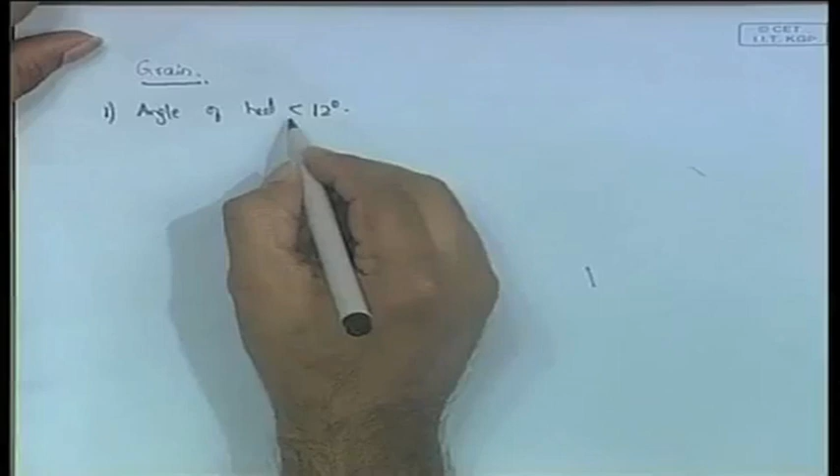When grains are put into the container and because of the grain shift, there is a heel of the ship. The rule says the angle of heel should definitely be less than 12 degrees. Because of the shift in the grain, there is a G0 G1, meaning a shift in the center of gravity, which results in a heel. The first rule says the maximum angle of heel due to any amount of grain shift should not be more than 12 degrees, or should be less than or equal to 12 degrees. It should not be greater than 12 degrees.

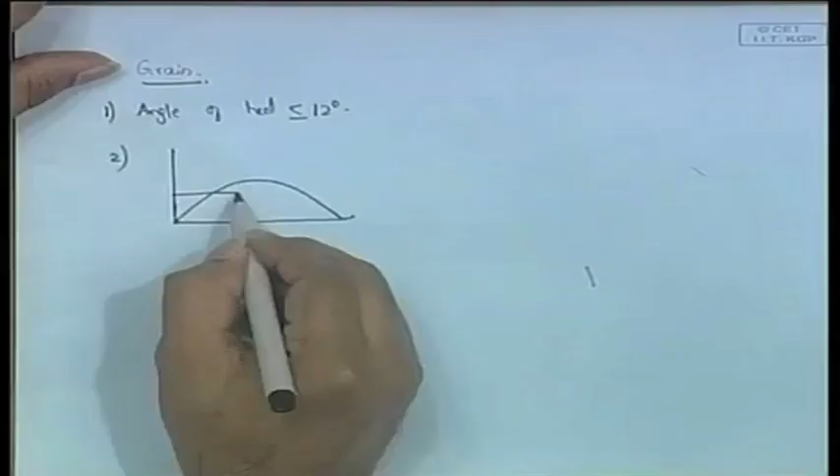Then the second rule is that in the GZ curve, when you have the statical stability curve, suppose this is your righting arm curve, and suppose you have a heeling arm curve like this. The rule says that the area between the righting arm curve and the heeling arm curve, up to an angle of 40 degrees or an angle of flooding if it occurs before.

Angle of flooding means that because of the heeling, some hole has come into contact with the water—that hole is actually on the freeboard, but because of the heeling it has now come into the water, as a result of which water is entering. That is called the angle of flooding.

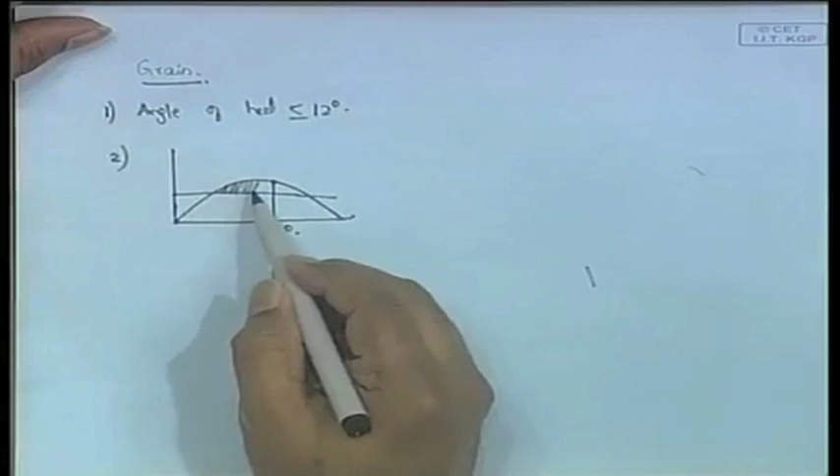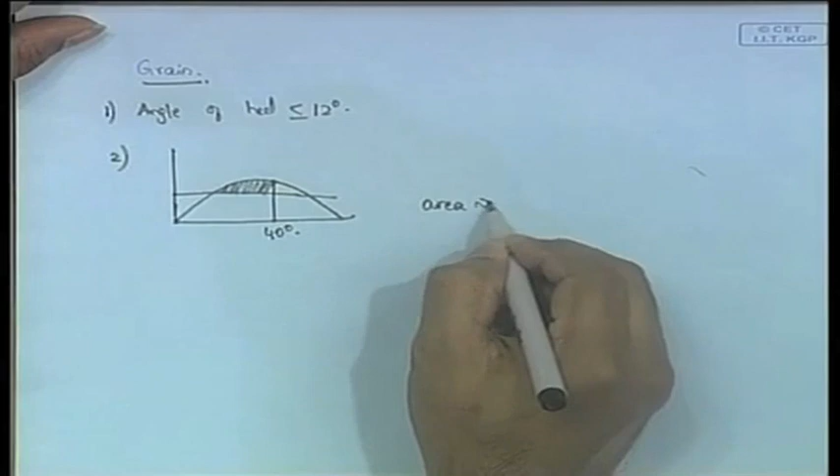So the area in the GZ curve between the righting arm and the heeling arm, between the angle of 0 degrees and 40 degrees, or the angle of flooding if it occurs before, this area should be at least 0.075 meter radians, or greater than or equal to 0.075 meter radians. That is the second condition.

Then the third condition is that GM, the metacentric height, should not be less than, or should be greater than or equal to, 0.3 meters. So the GM should definitely be greater than 0.3 meters. So these three conditions are the rules associated with grains.

Some time back I derived some other rules, so you have to remember all these rules. In the later stages, after the mid semester, we will deal explicitly with a lot of rules—rules associated with ships under different conditions like wind, heel, and all those kinds of things. There are a lot of rules associated with that you have to learn by heart and write as such. But for this mid semester, in 2 weeks, this much of rules associated with grains you have to remember, and something else I derived some time back. Those are rules associated with... some time back I did something here.

Okay, merchant ships, yes. So a vessel should have satisfactory stability—that is, the area under the righting curve should not be less than 0.055 meter radians up to an angle of 30 degrees. So all those things, those rules also you have to remember.

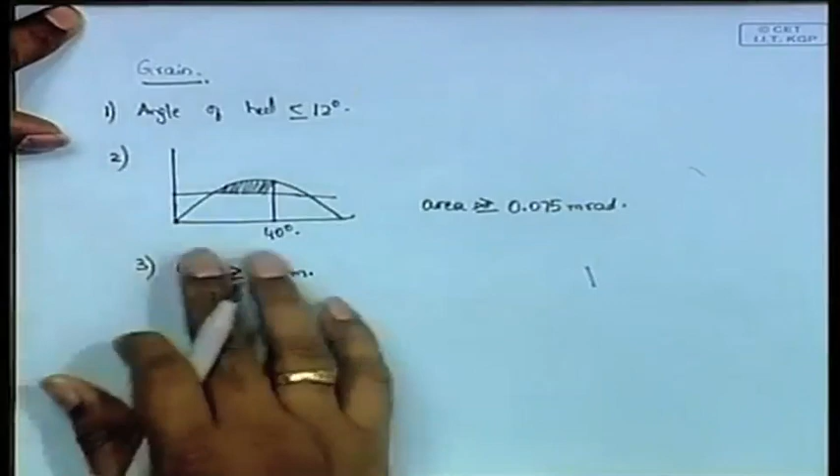In case you have such merchant ship conditions, the problem will state which rules you have to apply. The moment you see grains which are in container ships, you use these rules—the angle of heel, all three rules have to be satisfied. So the question will be whether the ship is stable, or is likely to be certified, something like that. If all three rules are satisfied, then yes, the ship is stable.

Note that even if it is exactly 12 degrees, it passes the test. Even if it is 0.3 meters, it passes the test. Similarly, 0.075 passes that. It's always equal to or greater than, not strictly greater than. So if it is any of those values, you pass the ship.

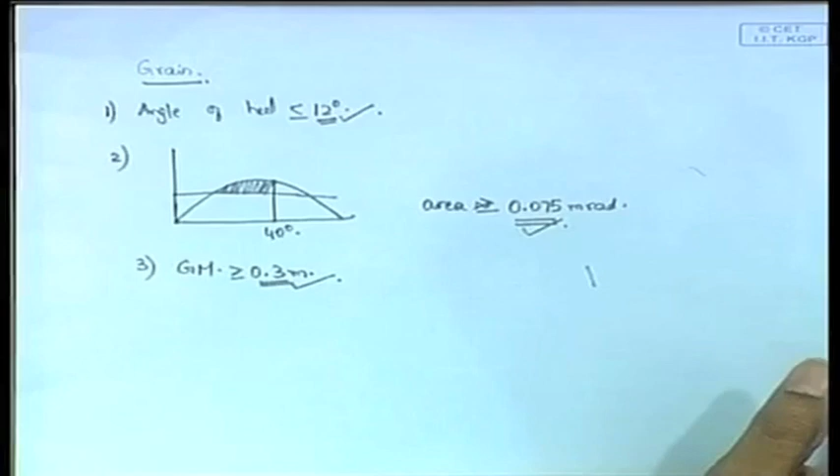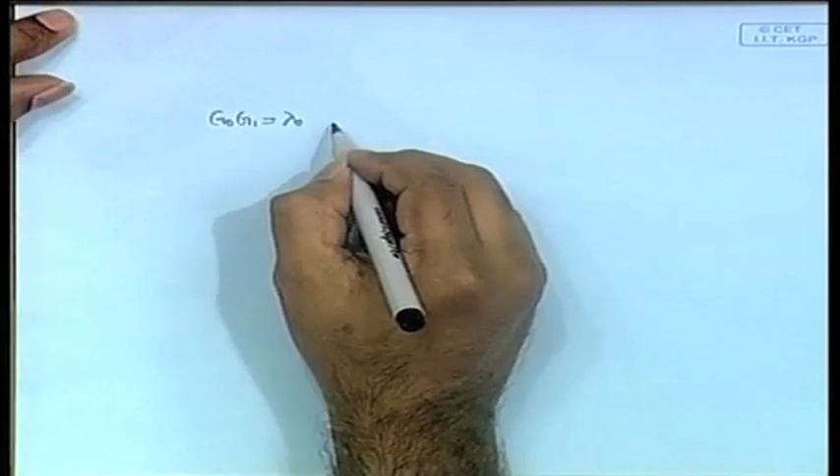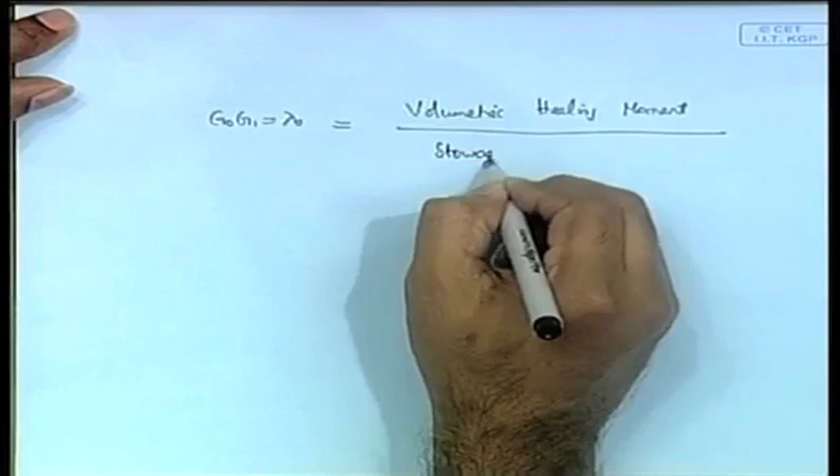Then some other things which I didn't explain exactly—in case of such grains, we use G0 G1, written as lambda 0. It is defined as the volumetric heeling moment divided by stowage factor into displacement.

So G0 G1, that is the shift in the center of gravity of the grain, which is producing your heeling for the ship, is equal to lambda 0.

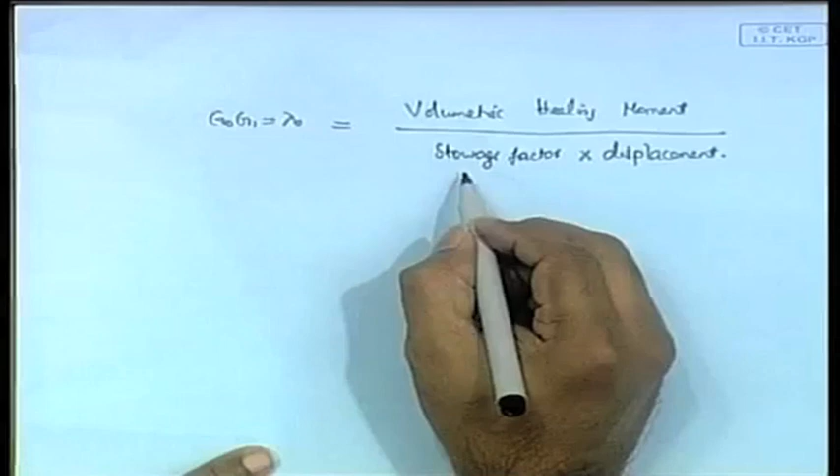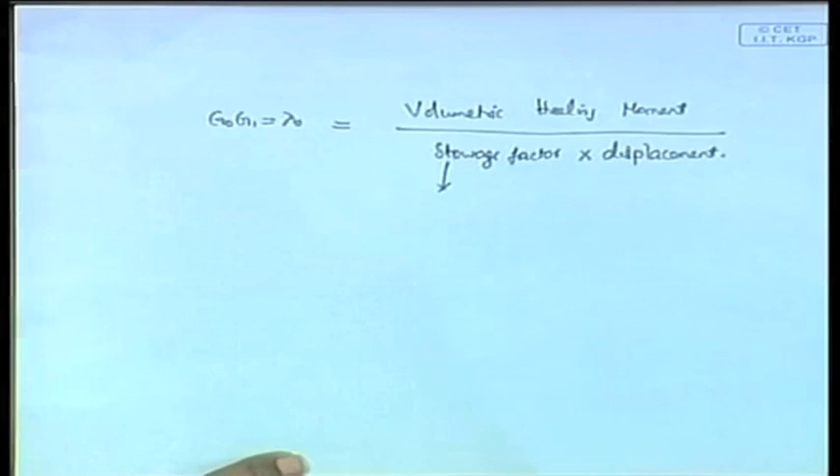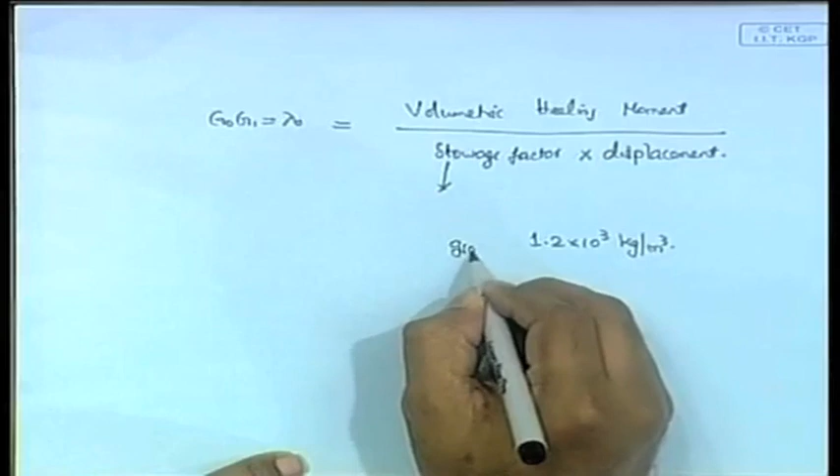This is equal to volumetric heeling moment. Now I didn't explain properly what is stowage factor earlier. I said something like a fraction, but that's not exactly right. Actually stowage factor means, suppose the density of that grain is 1.2 into 10 cube kilogram per meter cube. Let's suppose the density of the grain is this. Then the stowage factor is defined as 1 by 1.2 into 10 power 3.

It becomes meter cube per kilogram. This is the meaning of stowage factor. It is something like 1 by density. So it will become something like 10 power minus 3 kind of thing, meter cube per kilogram. That is the meaning of stowage factor.

So as you can see here, displacement is delta. It is not the volumetric displacement, it is the total displacement of the ship, which is the weight of the ship. So displacement will be in kilograms, and stowage factor is in meter cube per kilogram.

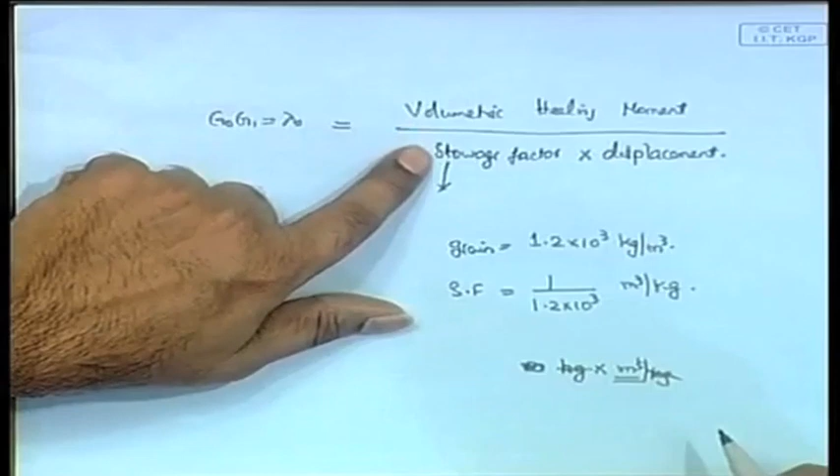So when you do that, you get something like a volume, meter cube, which has the dimensions of volume. Therefore, looking at the expression for G0 G1, which is lambda 0, it is the volumetric heeling moment divided by a volume. So that is an arm only, it's a distance. Since it's divided by volume, it becomes like a center of gravity, or G0 G1, that is the shift in the center of gravity. That is what gives you G0 G1.

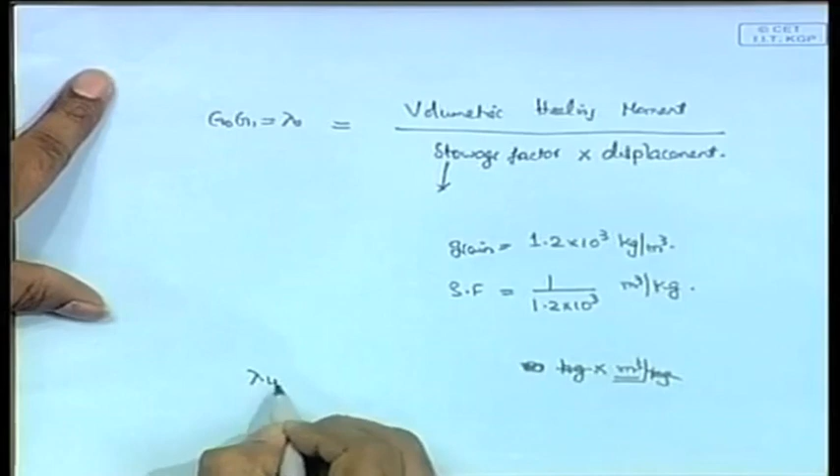Then lambda 40, meaning lambda at 40 degrees, is defined as 0.8 lambda 0. This is the second expression. This too you have to know.

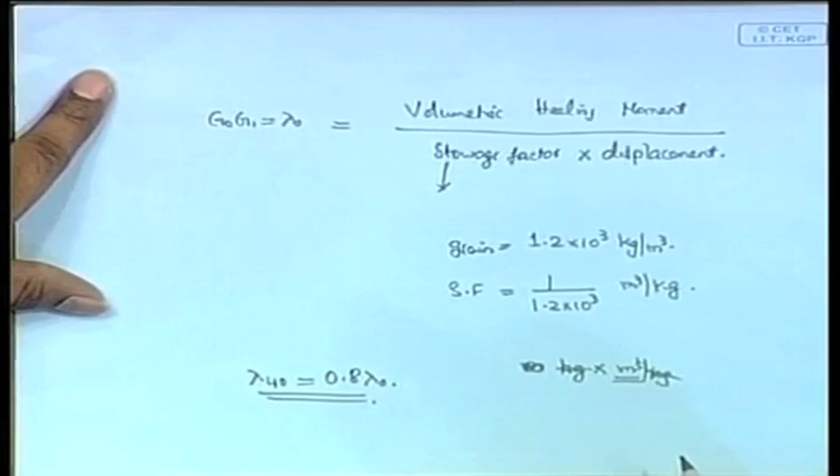Then let us do a problem. Probably this will explain it better.

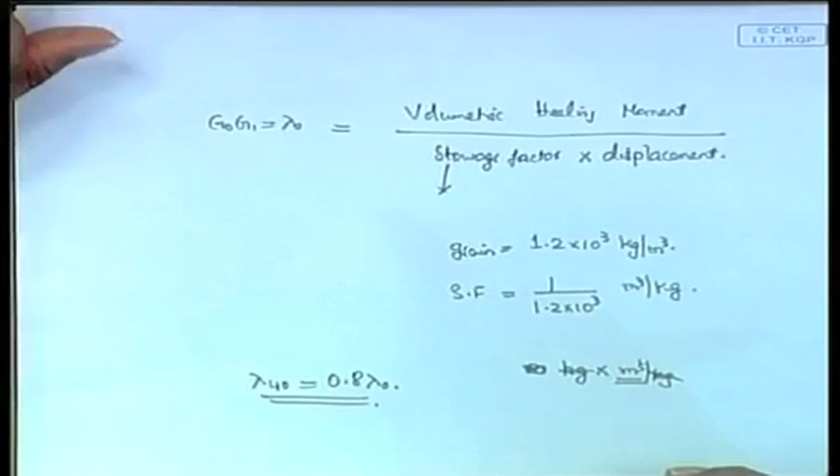Now you are told that there is a ship which has a light displacement of 7304 tons, and you are told that its KG is equal to 10.09 meters. Now this is a ship in which grain is added. So first of all, the moment you see the grain, make sure the question is going to be: will the ship satisfy the IMO criterion?

These are all IMO criterion questions. So will the ship satisfy the IMO criterion? First of all, of course, you have to remember the rules, then you will see how to do the problem.

Now you are given that the stowage factor is 1.3 meter cube per ton. So these things you have to change. Ton you change into kilogram, it will become 1.3 into 10 power minus 3 meter cube per kilogram. So don't forget that, you have to change that.

First compartment is filled fully, to full. Second compartment, the ullage is 8 meter. Third compartment is full. Fourth compartment is full. Fifth compartment, the ullage is 2 meter. Then it says that below that you are going to add oil.

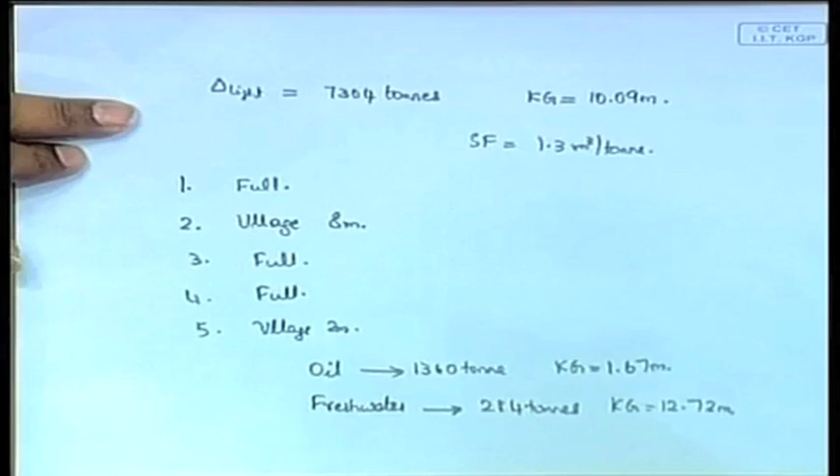KG, exactly. It is just for calculating your final KG of the ship. So it is just a measurement for KG, not for the movement of G in the horizontal direction—not for that, just for the vertical movement of G, that is the only thing.

So what you first have to do is find the net volumetric heeling moment, the net KG, and net displacement of the ship, because remember we have to find G0G1, which is lambda 0. In our definition, lambda 0 equals G0G1 equals volumetric heeling moment divided by stowage factor into displacement. So what do you need? You need the volumetric heeling moment and the displacement, two things.

Then that means now you have G0G1, from which you can get GM. To get GM, what do you need? One more thing, KM is given. In this problem KM is given as 11.3 meters, that I forgot to mention. KM is given as 11.3 meters.

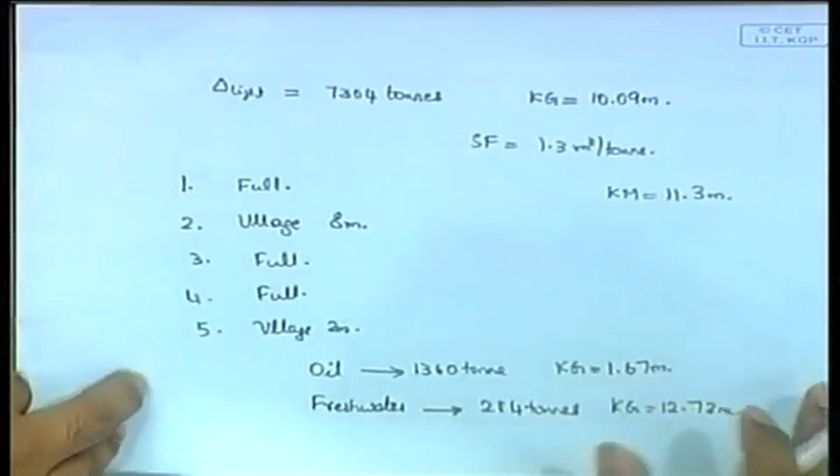So what do you have? What are you supposed to find? Remember, the three rules imply you need to find three things. There are three rules associated with grain. The first is the rule associated with theta, phi, the angle of heel. That means you need to find the angle of heel.

Now, what do you need to find the angle of heel? To find the angle of heel, if you remember, we are going to use the equations associated with the inclining test. You should remember the inclining test. To do the inclining test, you need two things: G0G1 and GM.

There are a lot of formulas we have derived so far, and of course they are all interrelated, but you have to remember them, all those formulas. So you have G0G1 and you have GM. G0G1 and GM are required in order to calculate theta. If you want, I can write the formula itself.

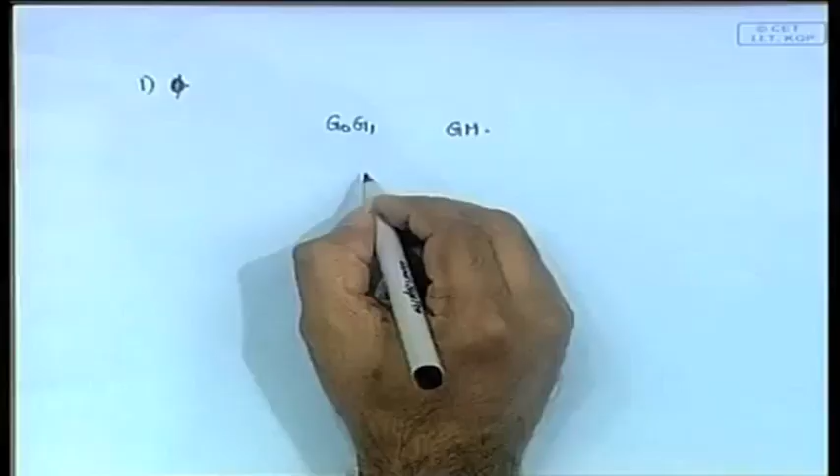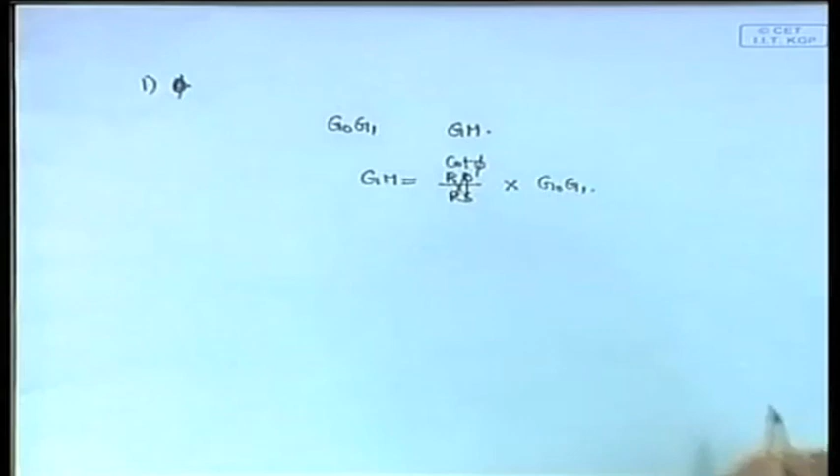This is the formula. It comes like this: R0 by R1, R0 by RS, becomes tan theta—no, I think it is cot phi. So this is the formula. So if you have to find your phi, this is the expression.

Please remember this expression. You will definitely have to use it—first of all, the question will have something to do with the derivation of heeling moment, the inclining test is sure, because it's a very important thing, the inclining test. So that means of course you will remember it. The method of derivation and the experiment is to be remembered definitely, and this final expression you just keep by heart: GM is equal to cot phi into G0G1. This expression is needed for a lot of such problems, and without that, you will get totally stuck on this problem.

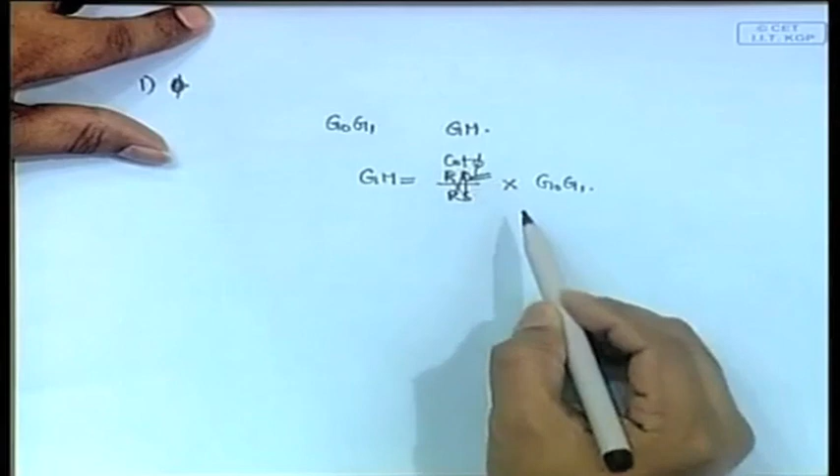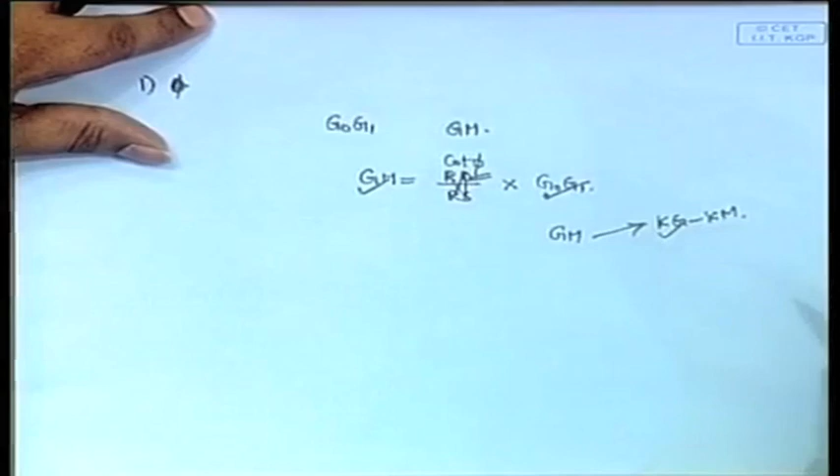Therefore, what we need to find here is phi. We need two things: G0G1 and GM. To get GM, what do we need? We need GM equals KM minus KG. This expression is to be remembered: KM minus KG. That means we need KG.

So Km minus Kg, this expression is to be remembered, therefore Gm. Km is given, that is fixed, there is nothing to do. Kg of the ship has to be found. This is important, from that you will get Gm.

So what have we found? First we need to find phi. There is a rule associated with phi, it says that phi should be less than or equal to 12 degrees. Number 2, it says that Gm should be greater than or equal to some value I gave, 0.3 meters. So from these two are required.

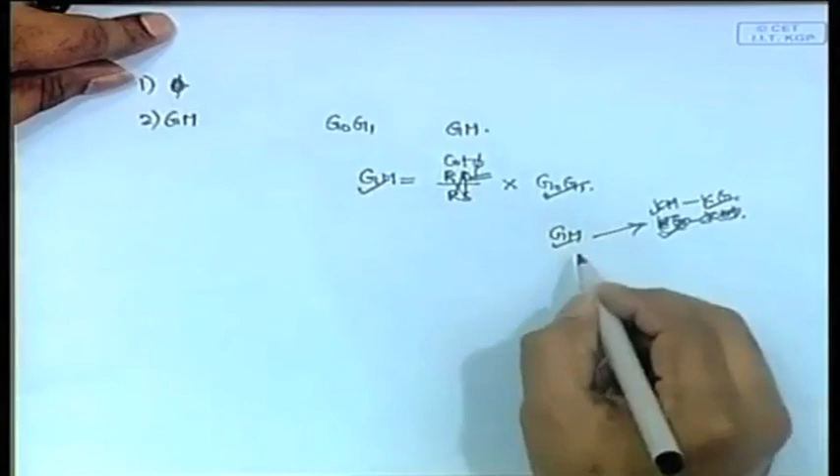Then 3, you have to find the area under the GZ curve, GZ phi curve between the heeling moment, and that area should be greater than something. So we will go step by step. The first thing is to find the, in one table itself we can do most of it.

So let us say this is a compartment, then the volume, then stowage factor, then volume, this is the weight, kg, moment, VHM. Now we make a table like this. This table should be able to calculate everything that you need in regards to this problem, that is we need to find the kg and lambda 0. So to do that, this table should be enough.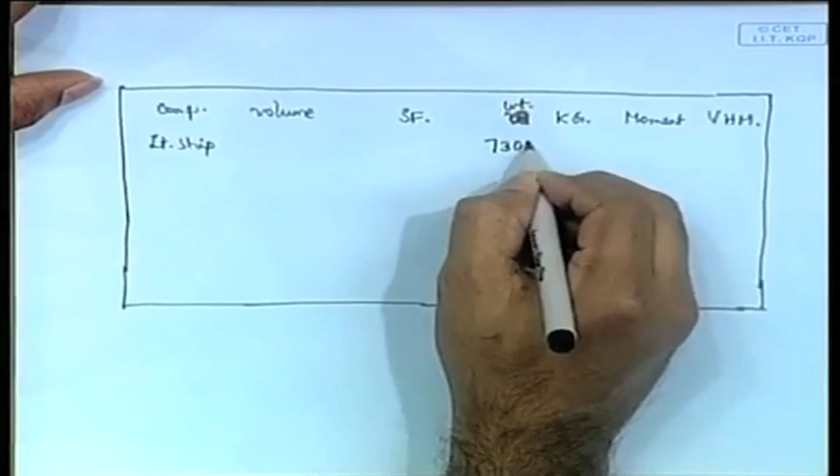So you have, let us take the first one, component is the light ship. Now light ship, there is no volume or stowage factor, the weight is given 7304 tons and its kg is given 10.09 meters. So you find the moment. Is there any volumetric heeling moment associated with the light ship? Note, volumetric heeling moment is the heeling moment associated with the shift of grain in a compartment. The light ship itself has no volumetric heeling moment, there is no grain there. So the light ship has no volumetric heeling moment, so this is not there.

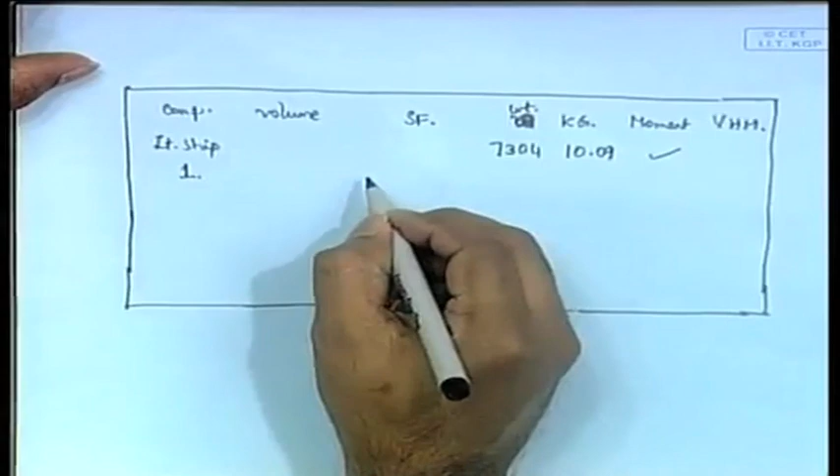Then you consider the first compartment in which grain has been added. They are told, now how do you find the volume of the first compartment? This is the first compartment, is full. So in this way you complete the table, you do it for all the components, and finally you have, in the end what you have, they have said oil. So all the different compartments are done, 1, 2, 3, 4, 5.

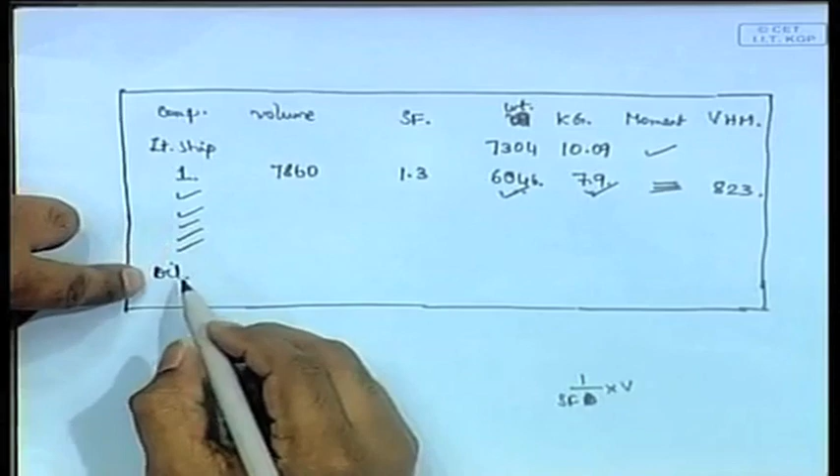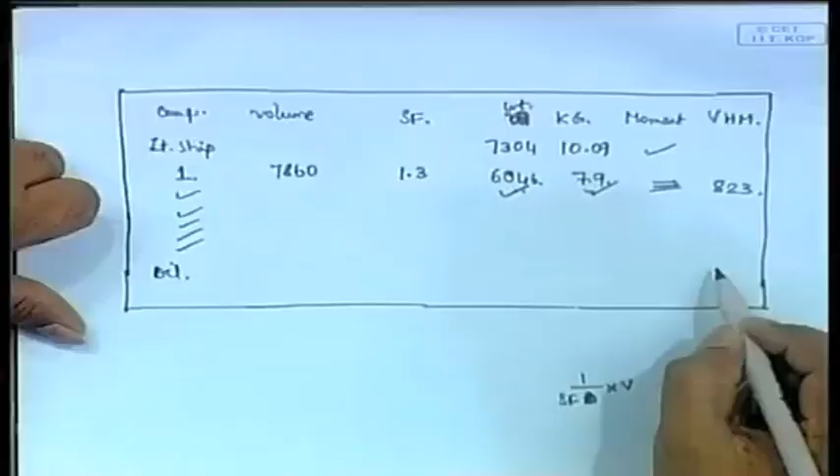So all the compartments are done, and then you have oil. For oil there is no volumetric heeling moment. Volumetric heeling moment is defined only for grain, it is a particular property of grain. As you might imagine, oil also shifts like grain, no such thing, it is defined like that. Volumetric heeling moment is defined only for grain. Therefore, forget about, there is no volumetric heeling moment as far as the oil is concerned. So this is not there, but this oil is given just for the sake of its weight and kg.

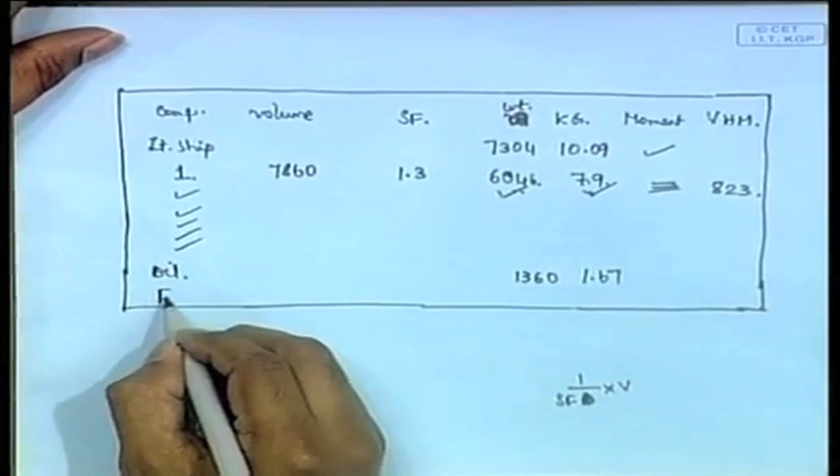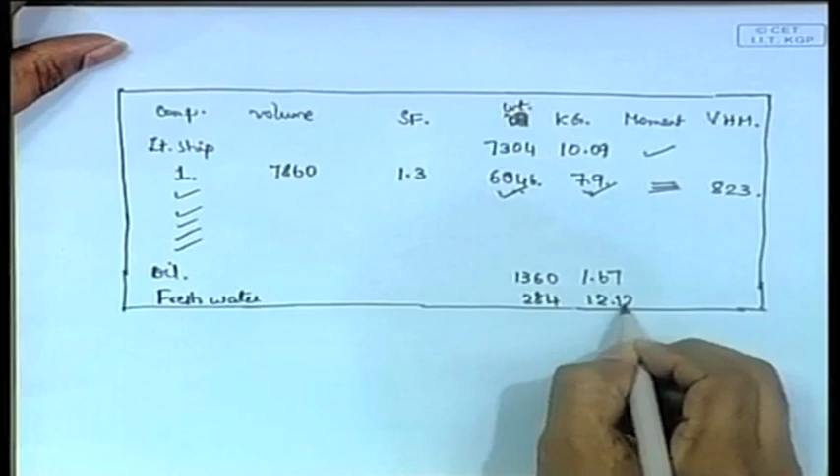Therefore, here only two things are important. Weight, it is given 1360 tons, so this comes, and its kg is given 1.67, and similarly you have fresh water. Fresh water is given, which has it says 284 tons and its kg is 12.12. Okay, now we have the complete table.

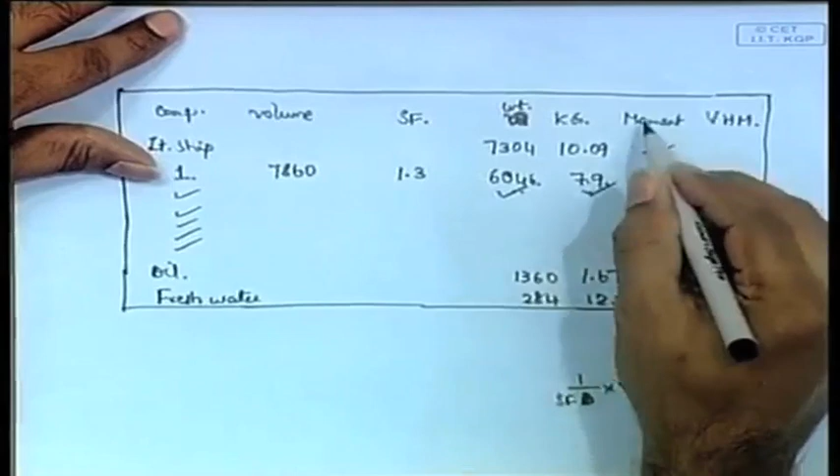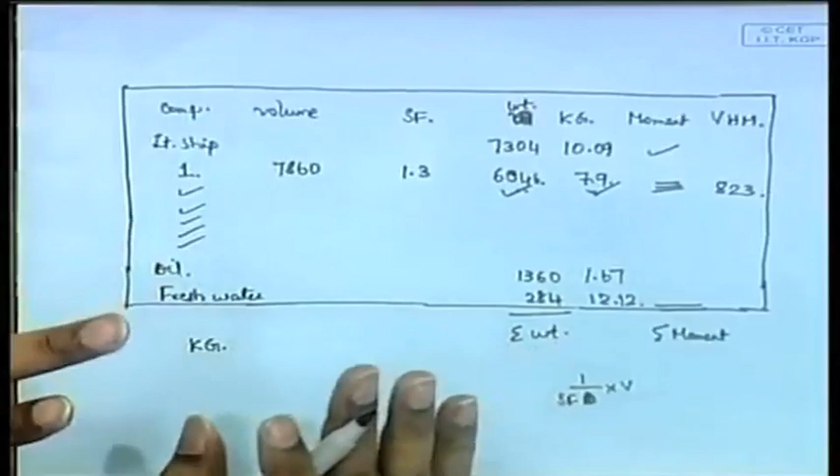Now, what do we find out from this table? See, here we have the total moment, which is weight into the kg, sum of the total moment, sigma moment, and this when summed up will give you the sigma weight, and therefore, your net kg of the ship after all the healing, everything is over, the net kg of the ship will be given by the sigma moment divided by sigma weight. This will give you the net kg of the ship.

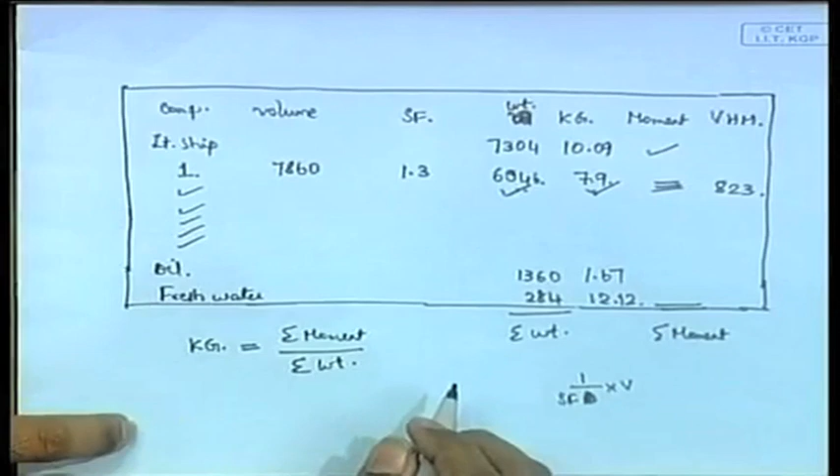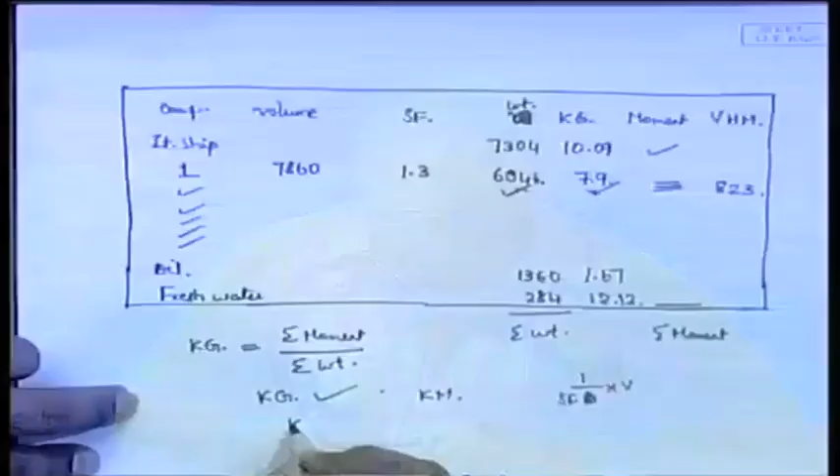So, now you have the kg, that is solved for. That is a very important thing, one important part is over. Now, you are given your km, it is given, km value is given, and note that these km values are not going to change because of the shift of grain or anything, km is fixed. Therefore, you do km minus kg, you get your gm.

And in this particular case, when you do that, you end up with a kg equal to some 7.8, km equal to 11.3, and you end up with gm equal to about 3.5 meters. So, this is the first thing you have to check. It says that gm should be greater than 0.3 meters, that is the first condition. So, in this case you are getting gm to be 3.5 meters, so you have no problem as far as that is concerned. So, that is the first check.

Now, that is satisfied. Next is, okay, next you have to calculate lambda 0. Now, lambda 0 is given by the formula volumetric heeling moment divided by displacement, into stowage factor, something like this. Now, again same thing we do, we'll look at this table.

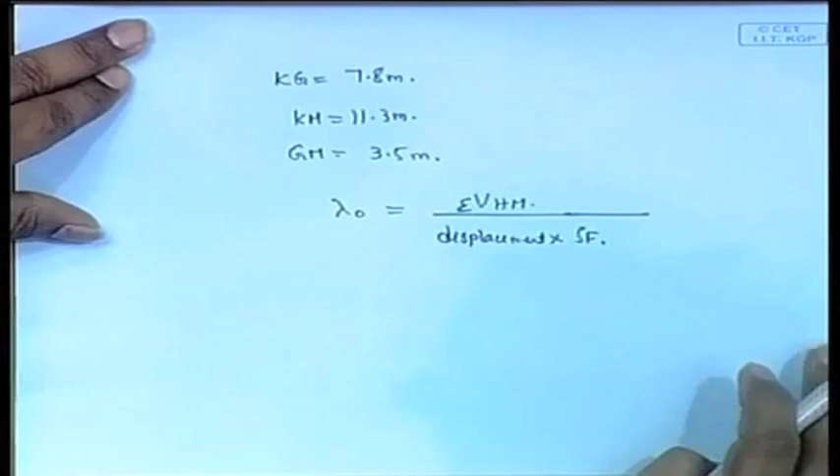So you have the total volumetric heeling moment as the last column in the table. Sum those volumetric heeling moments to get sigma volumetric heeling moment, that is your total volumetric heeling moment. Lambda 0 is equal to sigma volumetric heeling moment divided by displacement into stowage factor. Sigma volumetric heeling moment is the last column, and sigma displacement is the sigma weight. So you have sigma volumetric heeling moment divided by sigma weight into stowage factor.

Stowage factor is a constant, say 1.3 meter cube per ton, that is given. So this gives you lambda 0.

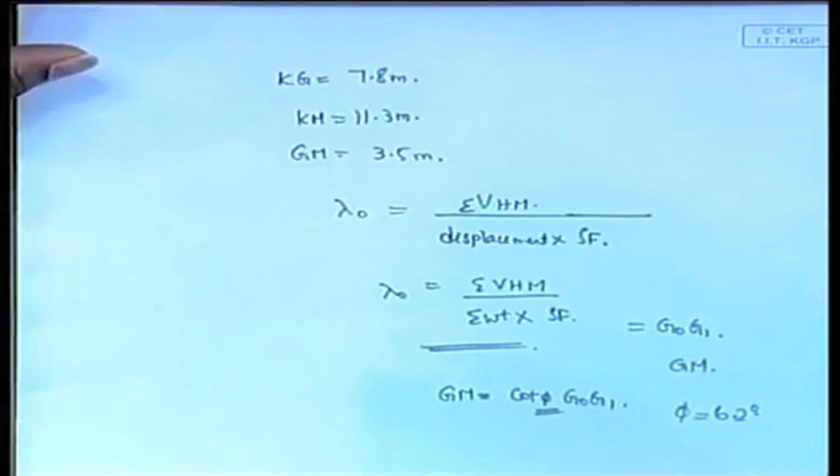Now this is equal to G0 G1. Note that you already have Gm, therefore Gm is equal to cot phi into G0 G1. Use that formula and find phi. If you have phi, in this case you will get phi to be 6.2 degrees. It should be less than 12 degrees. So that is also satisfied. 6.2 degrees satisfies that it should be less than 12 degrees. That is the second criterion. So two criterions are satisfied.

Now the third thing is to find your GZ, the area under the GZ curve. To do that you have to be given the GZ curve, otherwise you cannot do that. So either a GZ curve or a GZ table will be given to you. So the rest becomes very simple, that means you are given your GZ table, and you just draw the curve. So you are given your GZ curve.

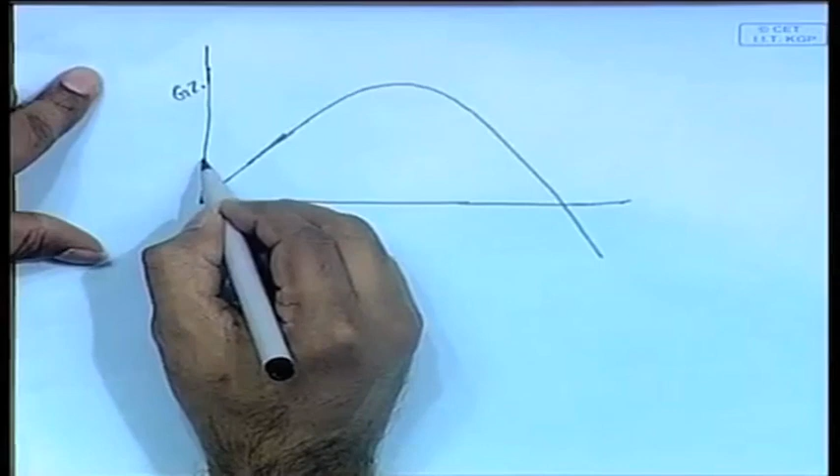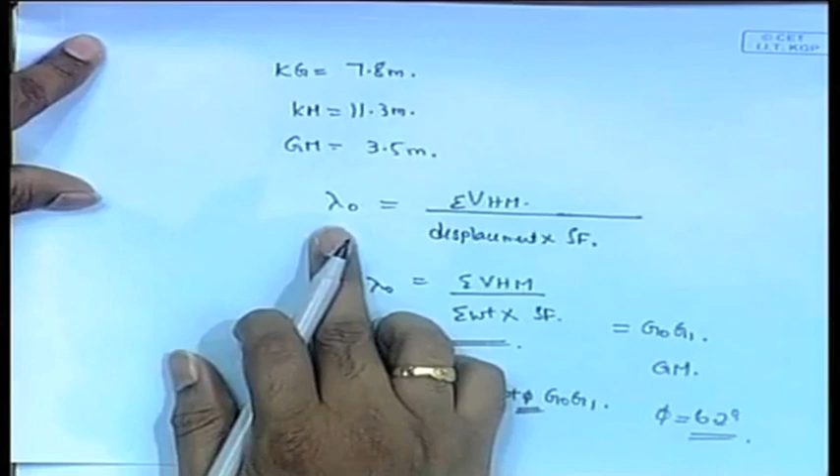Now how do you draw the heeling moment? The heeling moment is drawn like this. Remember you have drawn lambda 0, right? Here somewhere around this point you mark lambda 0, you have calculated lambda 0 as sigma volumetric heeling moment divided by displacement into stowage factor. This is something like a heeling arm. Lambda 0 is like a heeling arm. Therefore this lambda 0 is showing your heeling arm.

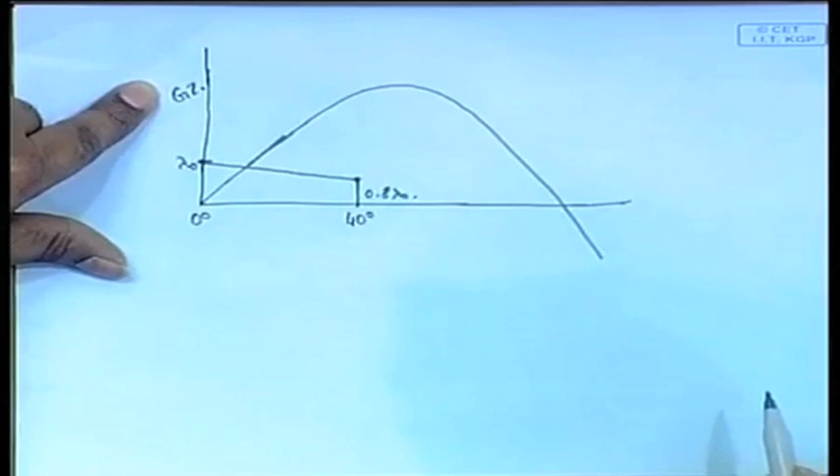Now lambda 0, the heeling arm, slowly changes when the ship heels, that heeling moment changes, and because of which the method adopted is: lambda 0 is marked here, then 0.8 lambda 0. Now 0.8 lambda 0 is marked here at 40 degrees. Let us assume this is 40 degrees, this is 0 degrees. At 0 degrees lambda 0 is marked. At 40 degrees you mark 0.8 lambda 0, and draw a straight line through these two.

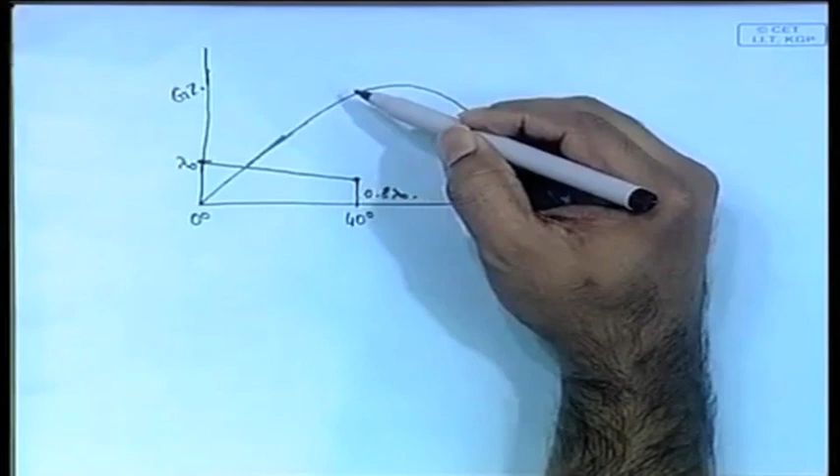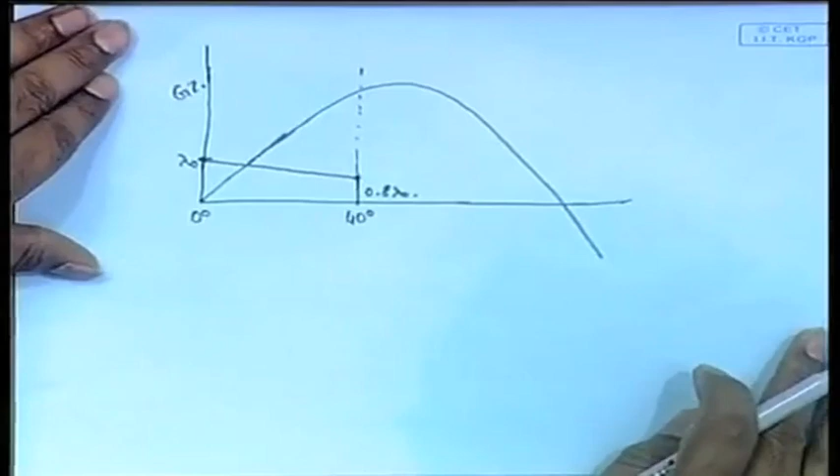This will give you the heeling arm curve. Therefore your objective now becomes to find the area between the heeling arm and the righting arm curve, which is this, between 0 and 40 degrees. So between 0 and 40 degrees, this is the angle between the heeling arm and... actually this is also an area under the curve. So this is the total area between the heeling arm and the righting arm curve. This total area is what you have to find out.

So this area should be, I think it should be greater than 0.075 meter radians.

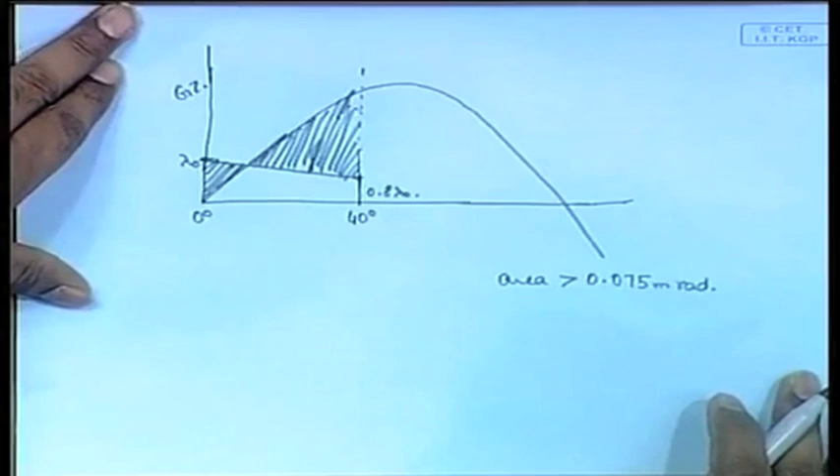So in this problem you will have, how do you find the area under the GZ? First of all, so you need to find... so this is how you find the area under the curve. You have the heel angle, then you have your GZ, then you will have your Simpson's multiplier, then function of area. So heel of 10, 20, 30, 40. You have your different GZs, you read from the graph, or you will be given the GZ table from which you write these values, and Simpson's multiplier is put here, 1 4 2 4, you put that Simpson's multiplier or trapezoidal multiplier, you find the area up to 40 degrees.

Note, when you find the area under the GZ curve, you are actually finding the area under the righting arm curve. Then you need to find the area of the trapezium made by lambda 0 and 0.8 lambda 0, and you have to subtract that. So that will give you the area between the righting arm and the heeling arm curve. So why up to 40 degrees chosen?

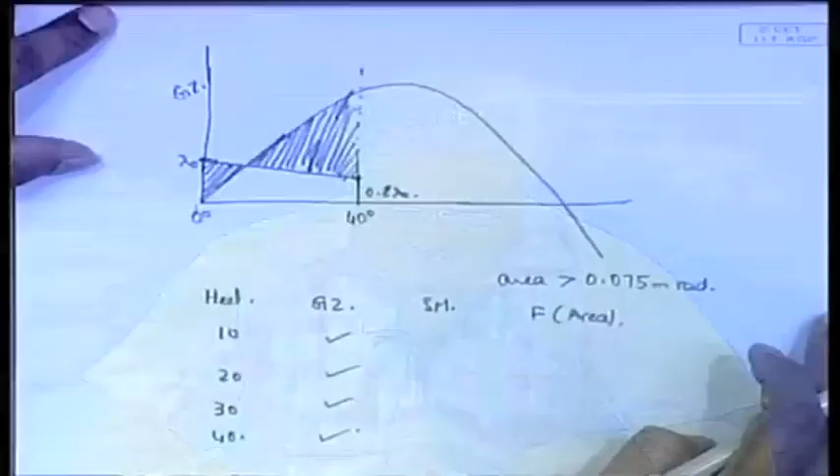Actually, I think if you look at the equation, it is because one of the rules always in ship design is that the GZ curve maximum should always occur less than 40 degrees or 35 degrees or something, that is the rule. That maximum should always be less than 30 degrees. So beyond that value, it's not an exact thing, the rule is not defined such that, we will see in the next, we have given always some safety factor to it, and then we are making the rule. So from 30 they have given, so that means the GZ curve maximum will never be greater than 40 degrees. It has to do something to do with that.

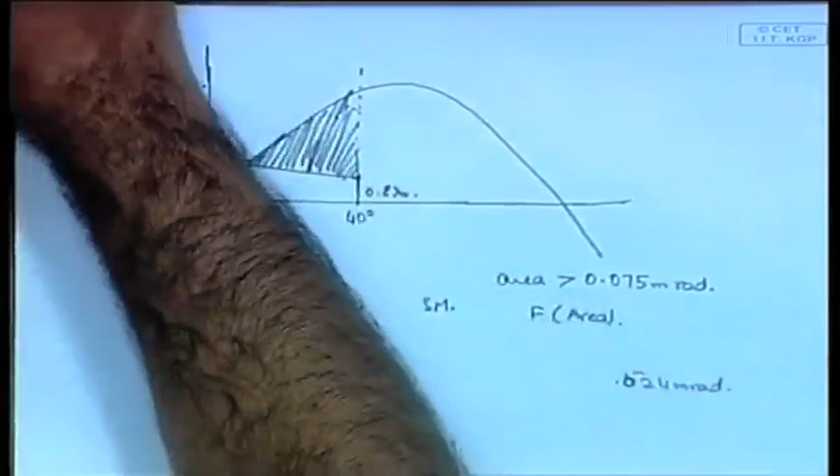I will check that. So this is why the area should be greater than 0.075 meter radians. So you find this area between the two curves. In this case, you will get it as something like 0.524 radians, meter radians. Let me check this, I think I didn't explain it properly, something I missed here, wait. The residual area between the heeling arm curve and the righting arm curve up to the angle of maximum difference or the angle of flooding should not be less than 0.075 meter radians.

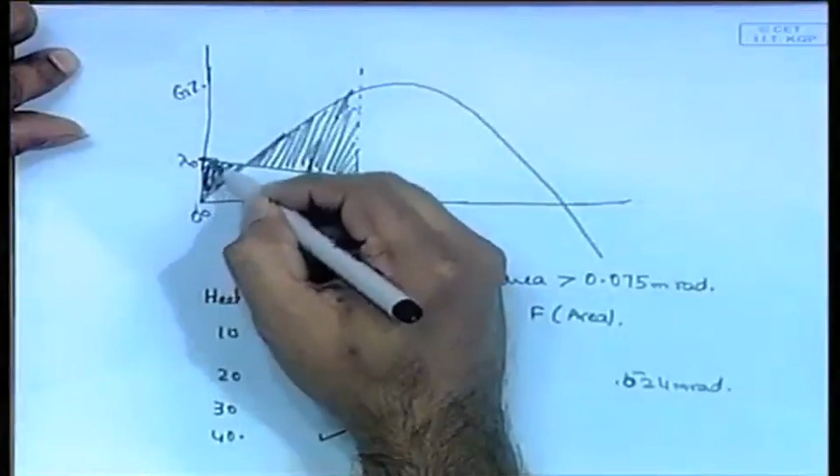Actually, what they have done is, see what is this point? This will be the point where the heeling arm curve equals the righting arm curve. This will be, in this case, we have got it as 6.2 degrees, this is how we have defined it. So the area from that angle up to 40 degrees should be greater than 0.075 meter radians, that is the rule. So this area should not be taken. You have to take the area from 6.2 degrees to 40 degrees. It is not the whole area, that is the rule.

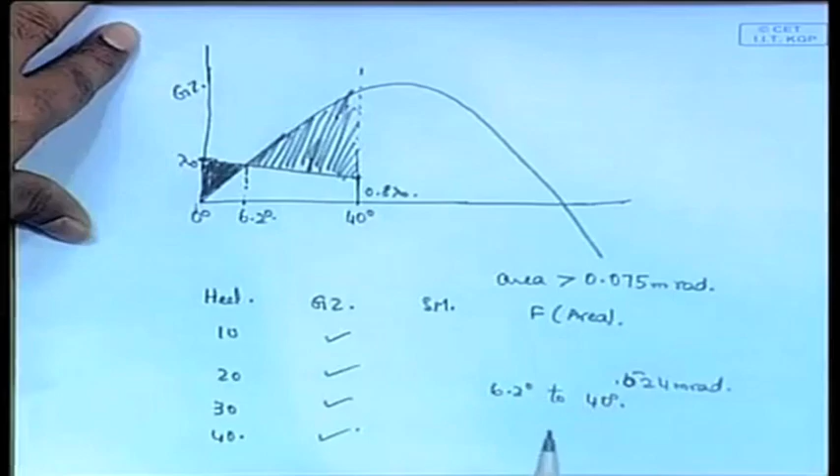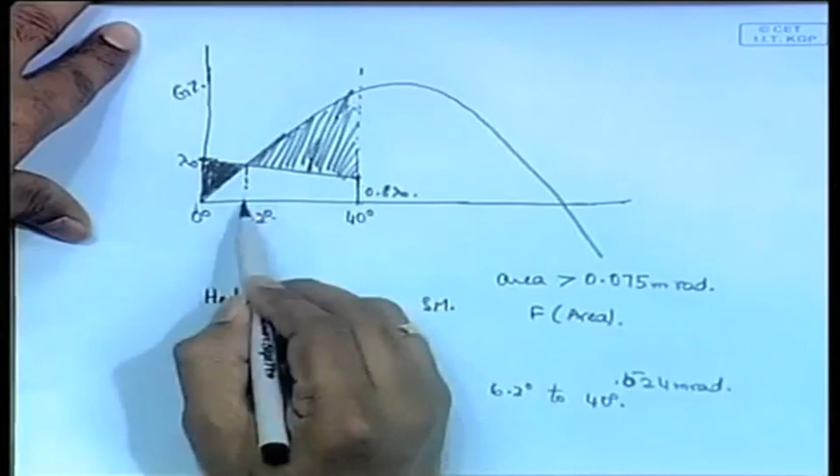This area. So first you have to find the area of the GZ curve between 6.2 degrees and 40 degrees, that will give you this whole area, this area plus this area. Subtract the area of this trapezium from it, and therefore you will get the area between 6.2 degrees and 40 degrees. So that area should be greater than 0.075 meter radians. In this case, it comes to 0.524 meter radians, and therefore this is much greater than 0.075 meter radians. Therefore, it's okay. So it is satisfying all the conditions, till now we have three conditions, all three conditions are satisfied by this ship.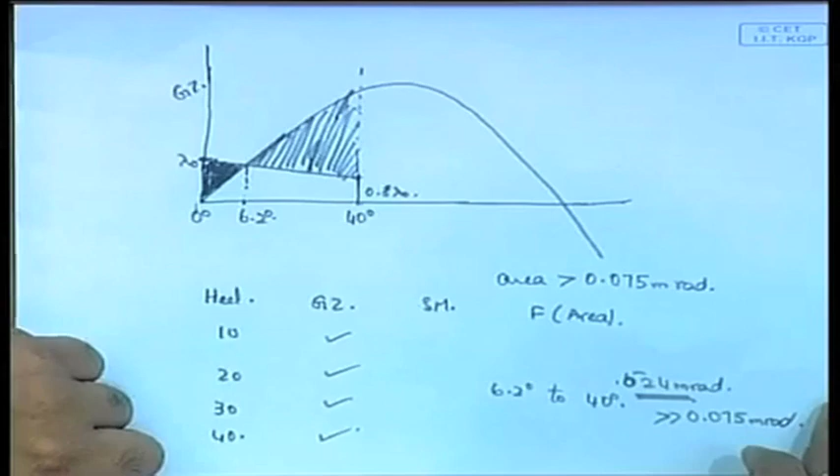I will repeat this because it is very important, and I told this wrongly. First, GM should be greater than or equal to 0.3 meter, that is the first condition, that is okay. Number 2 is the angle of heel, maximum angle of heel. How will you get the maximum angle of heel? You will get it from the equation for heeling, the equation for the inclining test. GM is equal to cot phi into G0G1. GM you have, G0G1 is got using volumetric heeling moment divided by stowage factor into displacement, that formula.

From that you will get G0G1. With that you get the value of cot phi, that is phi, you get the value of phi. Once you have phi, you make sure the value of phi is less than or equal to 12 degrees, that is your second condition of stability. Then the area between this value, that is this phi, in this case 6.2 degrees, this phi and 40 degrees, it is not between 0 and 40 degrees, it is the area between this angle and 40 degrees should be greater than or equal to 0.075 meter radians, that is the third rule.

So a couple of things, let me clarify some formulas you definitely have to be able to do. First, once given the GZ table or GZ curve, you should be able to find the area under the GZ curve. It's very simple, you just Simpsonize it and get the area. That you should be able to do.

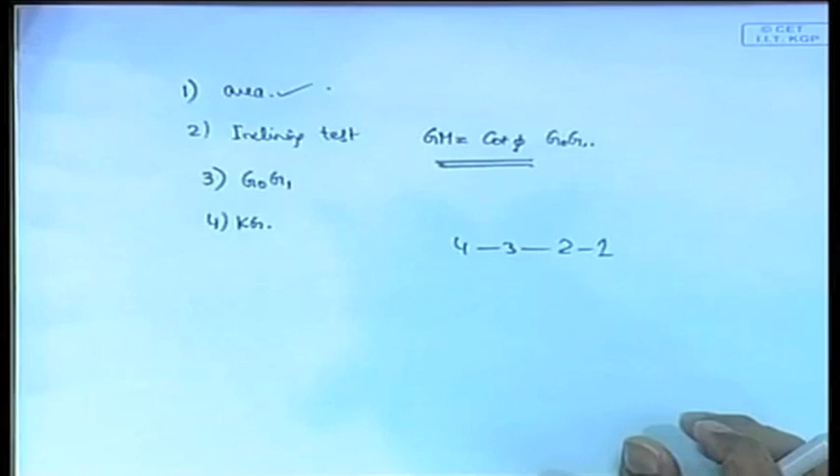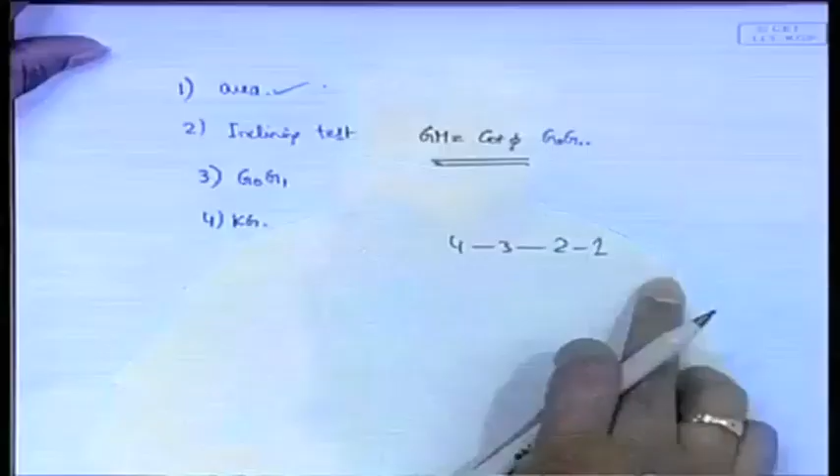Then all three criterions should be checked. To do one problem like this, I think it will take about an hour, probably 45 minutes at least for the whole problem. So I might not give you a full problem since that's too difficult, but I will ask you the steps to solve it, which you can write in 15 minutes. Suppose such a problem is given, how do you solve it? That you should be able to do.

The next topic is very long. I don't think we will be able to finish it in this class, but we will start with it.

Now it is due to the wind. We just found the heeling due to grain. Next is the heeling due to wind. So our purpose now is to find the heeling due to wind. Now the way we define the problem is like this.

Suppose you have the ship here, the part below the draft is under the water, and the part above the water is known as the freeboard, called the windage area, meaning the area open to the wind. This is the ship, this is the longitudinal direction, and at this point we have the waterline. So this much is below water and this much is above water. This total area is the windage area.

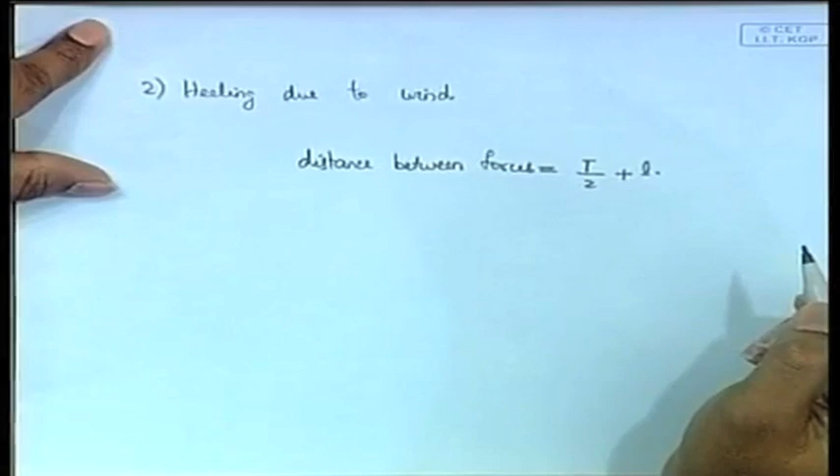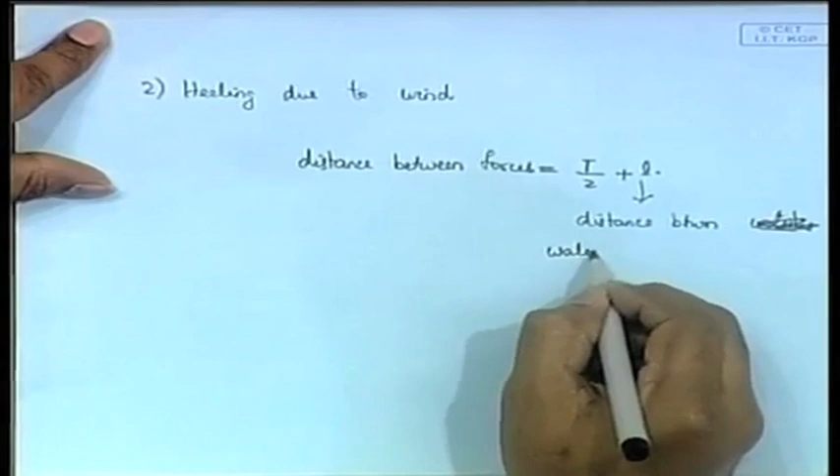So there is one force here, one force there, and the distance between the forces becomes something like, if T is the draft, T by 2 plus L, where L is the centroid - the distance between the water line and the centroid of the windage area.

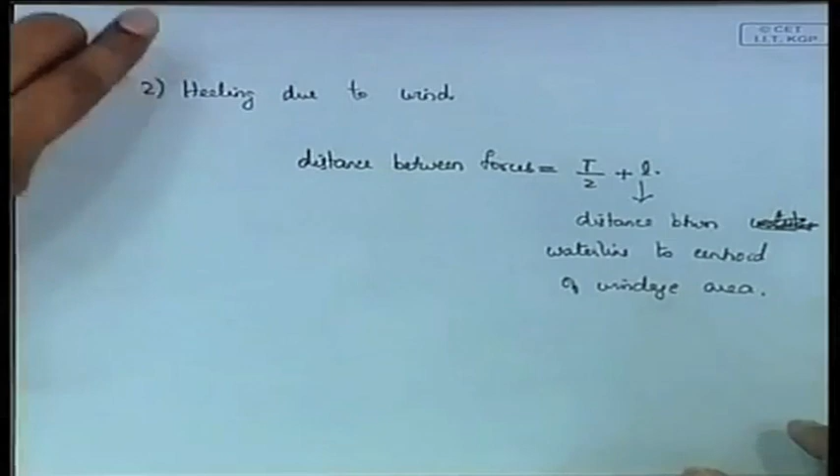So this is roughly your heeling moment - this is what is causing your heeling. So this is your heeling moment. Now, how do we solve the problem?

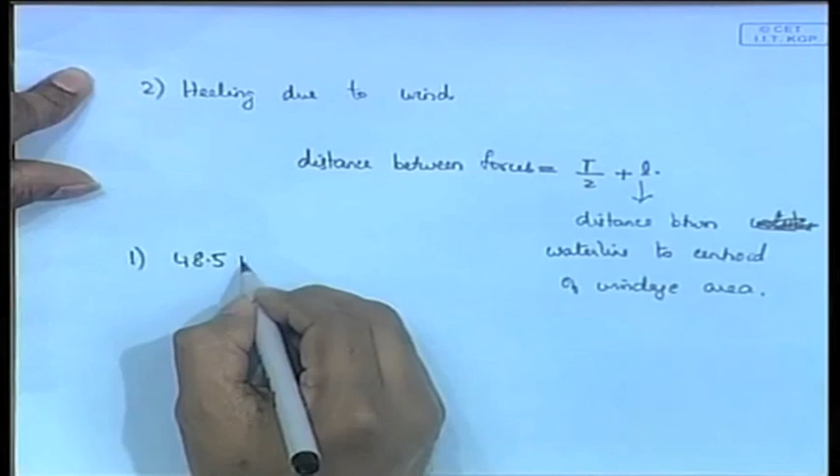When you are designing a ship, note that you will not be knowing what wind is acting on it. So obviously, the first step is to assume the worst possible wind and design for that. During the design stages, what they do is assume that the windage area is subjected to a steady wind loading of 48.5 kilogram per meter squared. This is the maximum kind of wind which can come anywhere - that is why it is the wind force limit. I don't think it's even just the maximum, it's maximum plus some safety factor. So that is the limit.

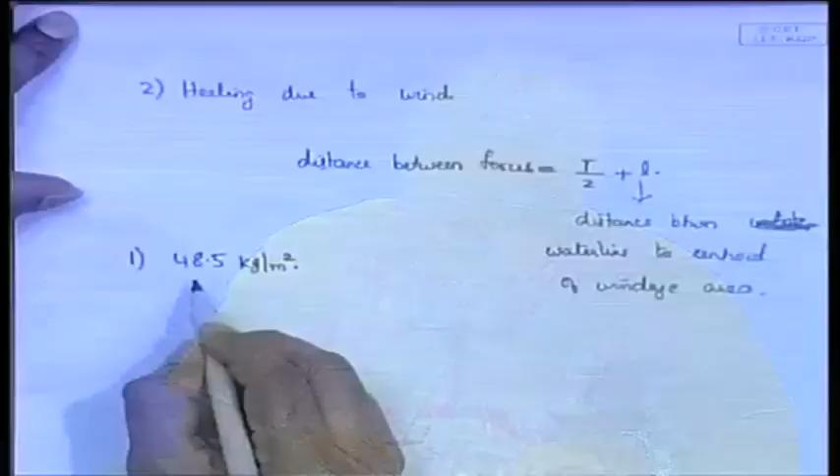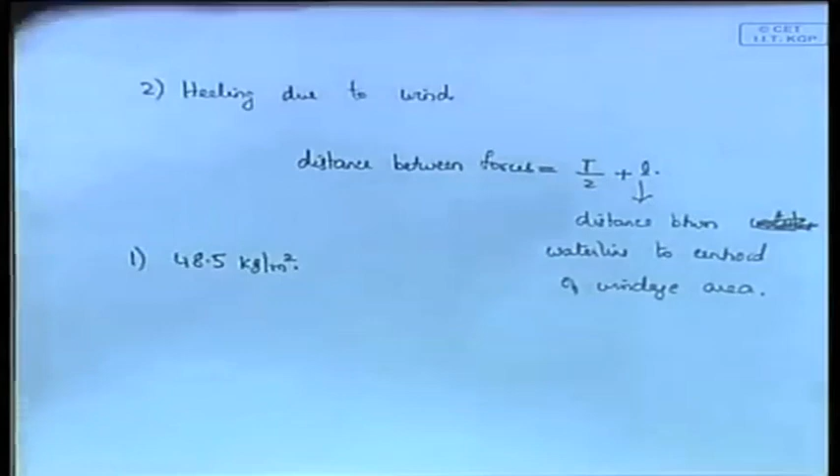So assume that 48.5 kilogram per meter square of wind is acting, and as a result, when multiplied with the windage area - which will in turn depend upon the ship, since windage area depends on the ship, it is the area of the ship - but this 48.5 is the maximum wind loading per windage area. So multiplied with the windage area, you get the force. This is the total force due to the wind. The same force acts as a reaction from the water, because the ship as such is not moving horizontally, meaning the ship is only heeling. Therefore, this force is equal to this force, and that is given by 48.5. This is the force acting.

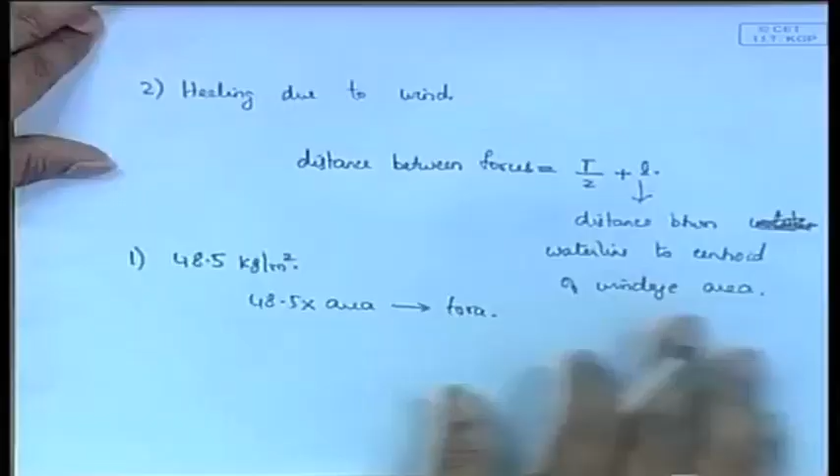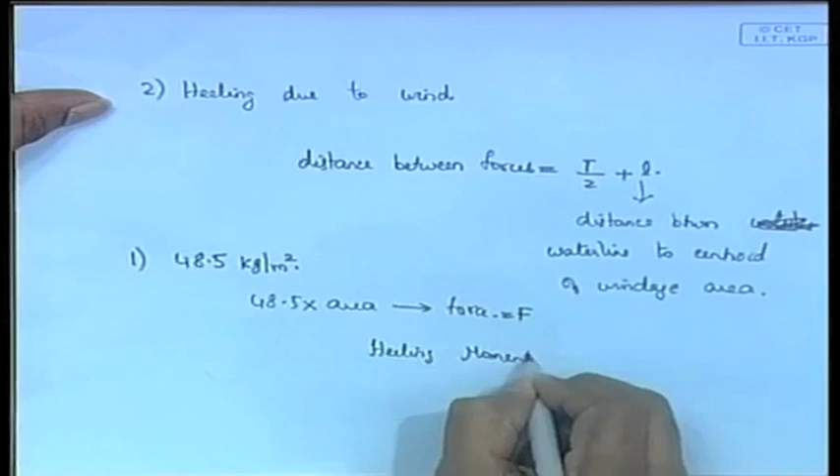Now, therefore, what is the heeling moment? Let us call this F. Heeling moment will be F into T by 2 plus L. This will be your heeling moment.

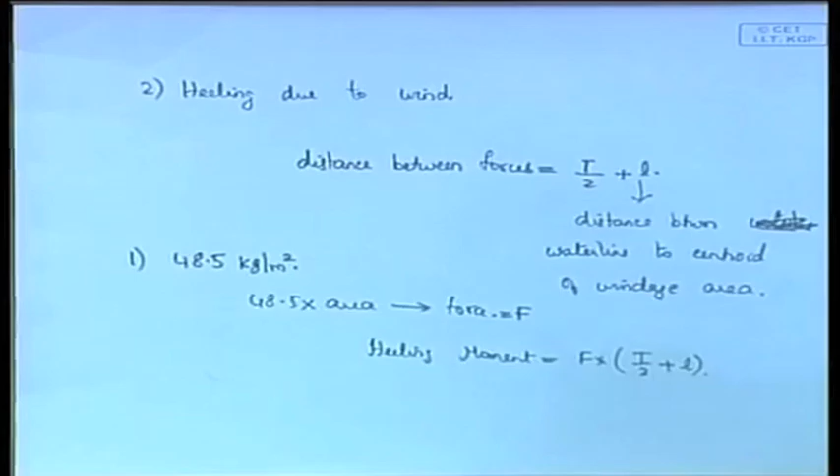Now, we have a set of rules which tell you how to solve for this wind case. This is a long process, it will probably take one class in itself, so we'll probably stop here. So this is how you start with the wind, and there are a set of assumptions - basically this is how you check if the stability is satisfied. You have to follow a series of steps, like an algorithm, and then decide whether the ship is stable or not. We will do that in the next class. Okay, we will stop here.